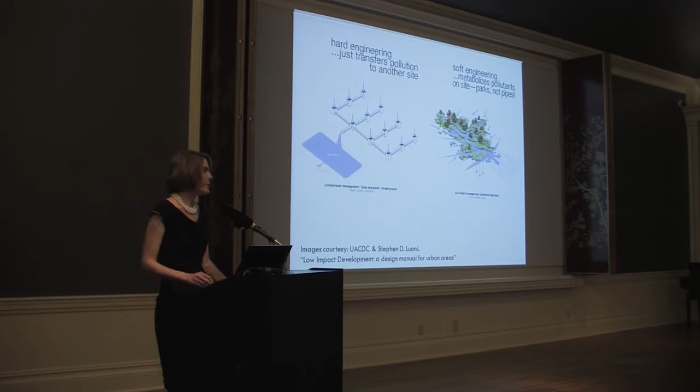Low impact development is a way to treat stormwater runoff that mimics the natural hydrology of a site, instead of the traditional method of piping it off site where it's not treated and goes directly into the streams. By using LID, you're able to filter out the pollutants and treat them on site, through the soils and through the plant material.

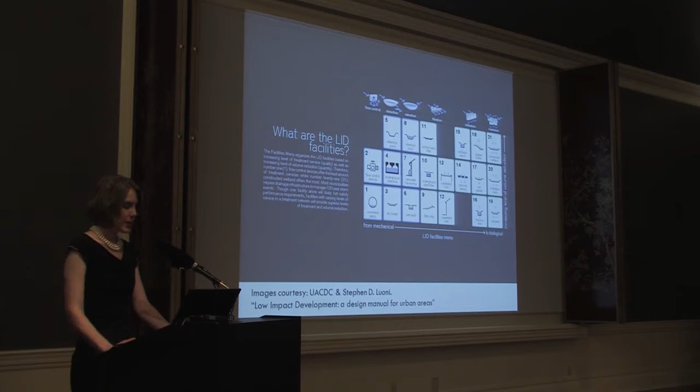So there are economic benefits because you use less pipe, but you also reduce flooding issues. There are many different types of low impact development technologies, like bioswales, tree box filters, infiltration basins, and filter strips, and teams were encouraged to pick a few that would work with this specific site. There are many more they could have picked from.

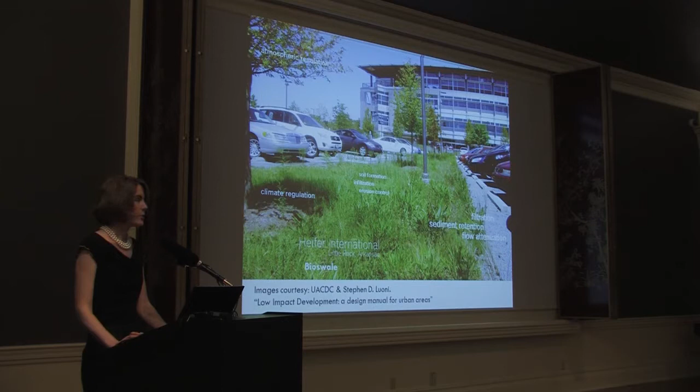This is an example of a bioswale in Little Rock. The water runoff from the parking lot goes into the bioswale, where the pollutants are treated.

Here is another parking lot in Missouri where porous pavement is used, along with the concept of using trees to evapotranspirate the stormwater. In Texas, there was another bioswale on the side of the highway that treats the pollutants coming off the highway, and also a tree box filter along a sidewalk.

And engraved in the cement it says 46,300 gallons of stormwater treated at that location. So it's one way to actually provide education in low impact development.

A competition is an innovative way to inspire the teams, the local firms, to learn about low impact development and use it to treat stormwater.

The impetus for the competition, as the mayor said, is the updated regulations that TDEC is rolling out in the next few years. Every municipality is going to have to face them, so this is one way, a fun kind of way, to get people ready for that.

Memphis-Shelby County Office of Sustainability is grateful for all the teams that participated, because by participating they advance the use of low impact development by demonstrating the economic impacts and the environmental impacts. So I want to thank them all for participating.

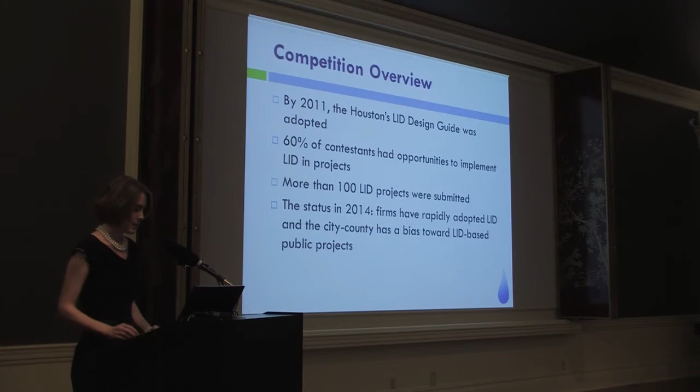Our project site is owned by United Housing. We have Tim Bowling, who owns the property, and his group is a nonprofit affordable housing agency. The location is at James, McLean and Fraser. They've already started building phase 1 of the Wolf River Bluffs, a 34 single-family development in Fraser, using EcoBuild design standards, which is MLGW's energy efficiency design standard for their housing stock, and the houses also have solar panels on top.

With their commitment to green development, we thought it was a natural fit to pick their location for the design competition. In green, you can see their phase 1 that's being built, and in yellow is the project site for this design competition.

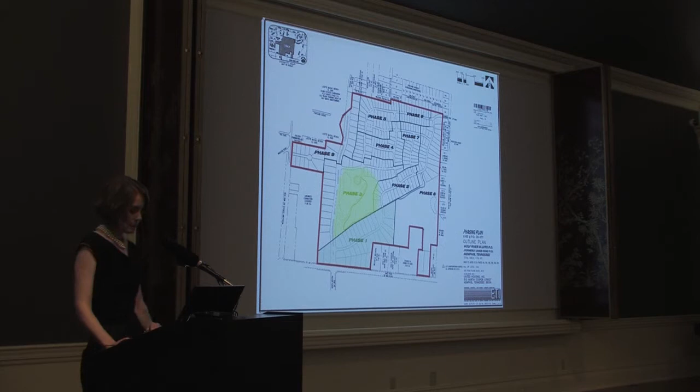Overall they have about 100 acres of property. Currently it's a wooded site with a 1 acre lake. As you can see from this 3D vicinity map, the site is extremely challenging because of topography. There's a large depression there, and it would normally be the last place on Earth you would build houses. So we definitely gave them something to shoot for.

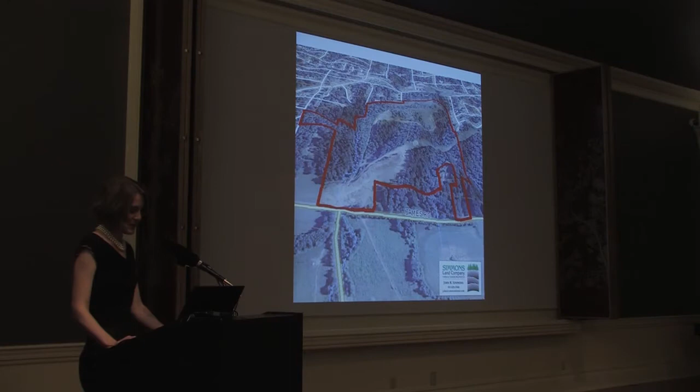I just have a little video that will kind of get you a feel for the landscape. And that's McLean and James right there.

Our teams that participated today had to have 1 licensed civil engineer and 1 licensed landscape architect, and they could add to that any way they saw fit. The goals were to reduce runoff, improve water quality, and lower the total cost of development. Teams had to treat the first 1 inch of rainfall, and if they couldn't do that, they had to treat the remainder for pollutants.

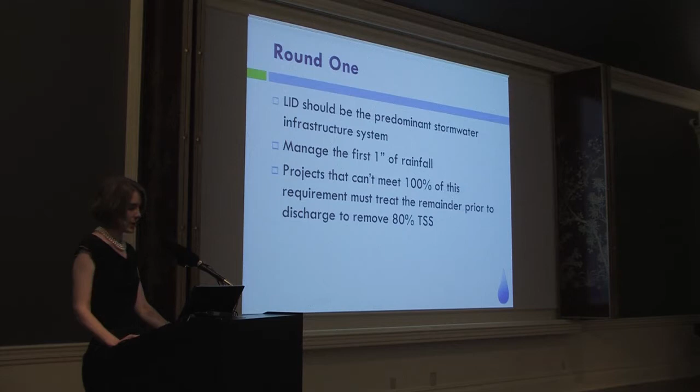United Housing had their own set of criteria for what they wanted to see on their site. It's 12.5 acres with a 1 acre lake. They wanted 4 one-story townhomes specifically for seniors, at 800 square feet, in cluster development with parking scattered throughout the site rather than one massive parking lot. They also wanted a small amenity center, gated access off McLean Boulevard, and passive recreation around the lake for the seniors.

Round 1 judging was 80% of the score, and that's already taken place by the experts in Houston. I went out to Houston and participated and observed them. They are all leaders in low impact development for Houston, and they were really glad to participate.

Round 2 celebrity judges are here tonight, and I want to introduce them: Mayor Mark Luttrell, Shelby County Mayor, who already gave welcome remarks. And then, if you want to stand: Bob Martineau, TDEC Commissioner, Jim Strickland, City Council Chair, and Mark Billingsley, County Commissioner.

Don Green, President-elect of Tennessee Stormwater Association, comes from Chattanooga, and he just finished his own low-impact development competition, so I appreciate him coming that far. Tom Needham, Director of Public Works for Shelby County.

Manny Belen, Deputy Director of City Engineering. Chip Saliba, Land Use Controls Manager for OPD. Mike Flowers, Landscape Architect and Administrator of Parks for City of Memphis. Rick McClanahan, Director of City Engineering in Bartlett.

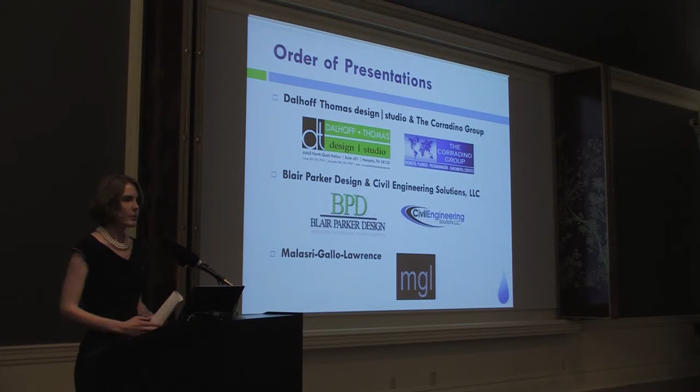In the order of presentations tonight, this was randomly chosen. Dalhoff Thomas will come forward first, then we'll have Blair Parker, and then JT Malasri-Gallo and Lawrence. So if Dalhoff Thomas could come forward and get your mics on. Each person will have a 7 minute lightning round presentation.

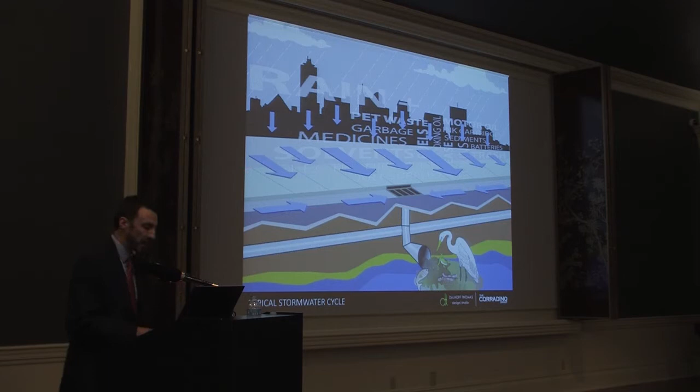Stormwater is one of those elements that is often out of sight and out of mind. In our normal stormwater cycle, we direct runoff full of pollutants into an inlet where it goes into a pipe and eventually empties into a water source such as a stream or lake. In a neighborhood, this is traditionally where it ends up, in a big grass detention basin. It's unsightly and takes up land that could be used for homes or parks. So why do we do it this way? Well, you'll hear it's efficient, this is the way we've always done it, and this is what we know. But what if there's a better way?

Our design focuses on 5 elements, and these icons will be repeated throughout our presentation: site planning, economics, stormwater, environmental, and quality of life, to make a better development.

Our site plan starts with locating homes on 3 areas on site for a total of 40 homes. We avoided development in this area because it acts as a major drainage way for the properties to the north. We preserved the existing pond and located a clubhouse with a green roof at the southern end. We have a gated access from McLean and 2 internal drives for access. We located a neighborhood park in the existing MLGW easement, and we also have street trees and pedestrian lighting throughout.

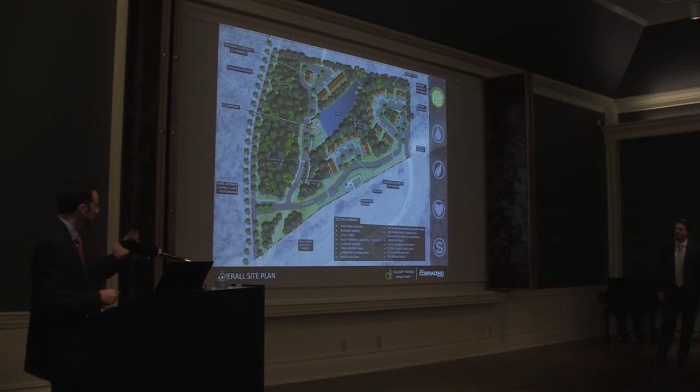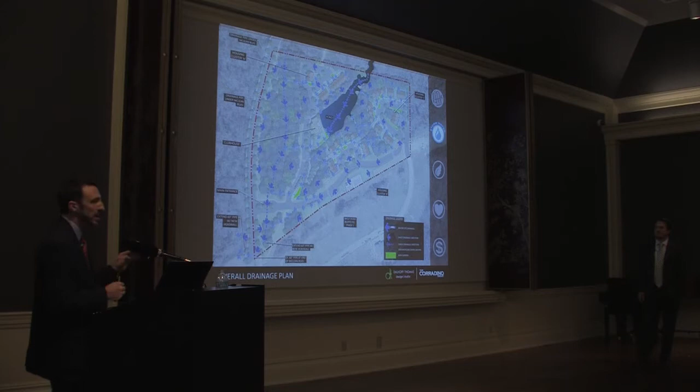Our drainage plan maintains the existing drainage patterns on site. Our design takes all the runoff from the roads and parking areas full of pollutants and captures it in over 40 rain gardens dispersed throughout the site. It infiltrates it and cleanses it before it is released into natural areas and flows into the pond, all without any traditional pipe or structures. The stormwater that is finally released into this western portion is a smaller amount because we allow much of it to infiltrate. It's released at a slower rate so it won't contribute to overwhelming the storm system. It's much cooler and it's much cleaner.

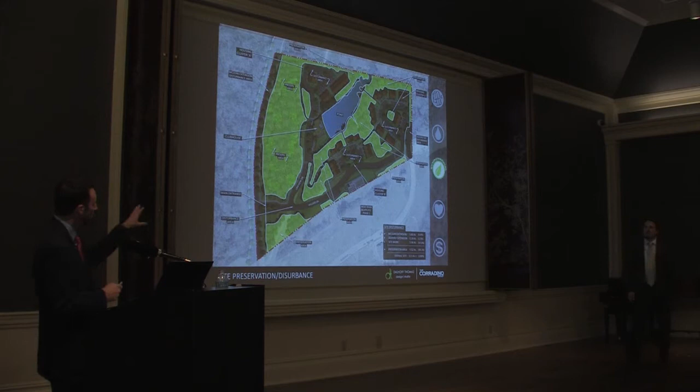From an environmental focus, we worked with the existing topography and tree cover to maintain 44% of the site, as you can see in green, as undisturbed.

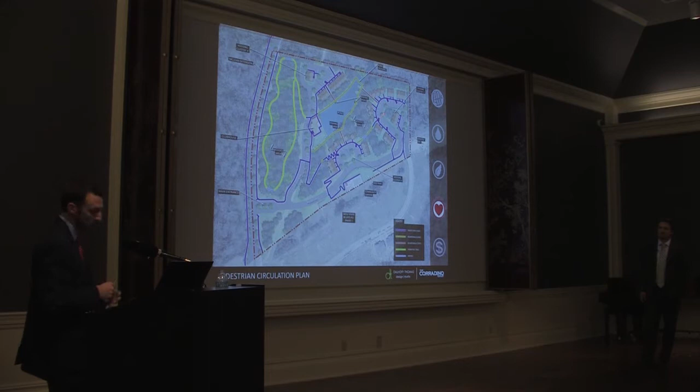With senior housing, accessibility is an important quality of life. So the purple, orange, and yellow lines all designate ADA paths that make the entire property pedestrian accessible. Also important to the quality of life are the amenities and open space. Our community park contains a garden area and a dog park. Green space is distributed in all the clusters so that residents have a place to walk their pets or have activities. And a large lawn is located at the clubhouse for community events.

This enlargement shows how all the elements come together in a housing cluster. The homes are accessed from a one-way drive. We have angled parking and provide 1 parking space per home plus visitor parking. The homes are built on conventional foundations that step down the slope. Trees around the cluster are preserved so that every home has views into existing woods. Rain gardens and private gardens are provided at the front of every home, and paths provide access to the adjacent cluster, down the hill to the clubhouse, and down to the boardwalk around the pond.

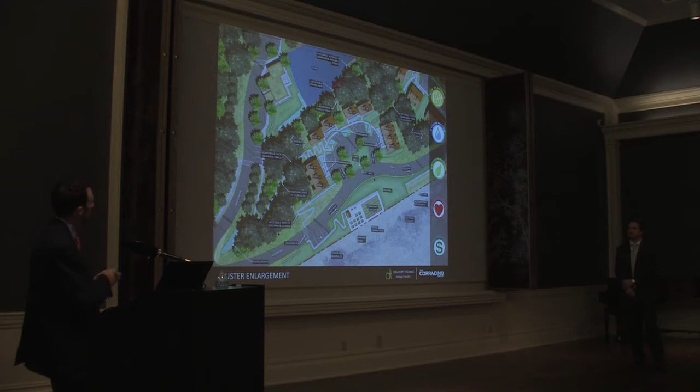This is how the rain garden works. Each of these homes' foundations has a finished floor that is stepped so that it's lower than the one next to it. This allows us to elevate the paths that lead to the homes so that we create these rain garden cells in front of each home, connected by openings under the sidewalk. The profile of our rain garden includes 30 inches of soil with an 8-inch drainage layer, and in that 8-inch drainage layer is a 6-inch perforated drain pipe. So we direct stormwater into our rain garden cells. Within the cells, the water is allowed to pond up to 6 inches in depth. This slows the water down and allows it to infiltrate into the soil.

We also have the cells planted with native plants. They help slow the water down and take up the water. Many of these plants are hyperaccumulators, meaning they actually absorb the pollutants in the water. So once the water reaches this 6-inch depth, the opening beneath the sidewalk allows the excess drainage to flow

into the adjacent rain garden where it can be cleansed or infiltrated. This treatment method continues all the way down the hill through the cluster until the stormwater is released as sheet flow, flowing across the natural vegetation into the pond. In a large storm event, each cell has an overflow pipe that can carry water through an underground piping system to the release point.

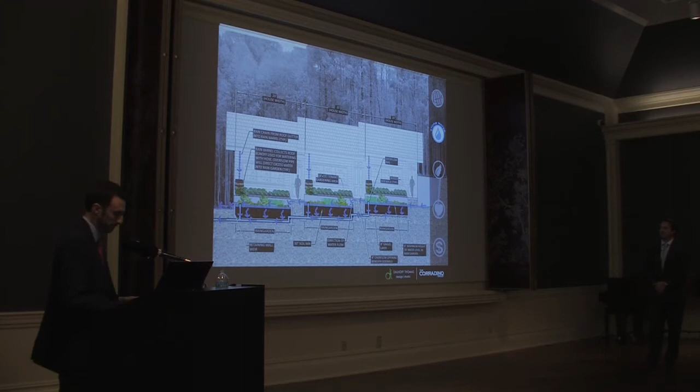Our design creates a garden at the front of each residence. This is a rain garden next to the private garden, and it provides not only stormwater control, but plant habitat and wildlife habitat. Each home is also equipped with a rain barrel to collect rain to water their private garden. Residents get to interact with the garden every day, and whether they know it or not, they're looking at the stormwater control system. Wouldn't this be a great place to be?

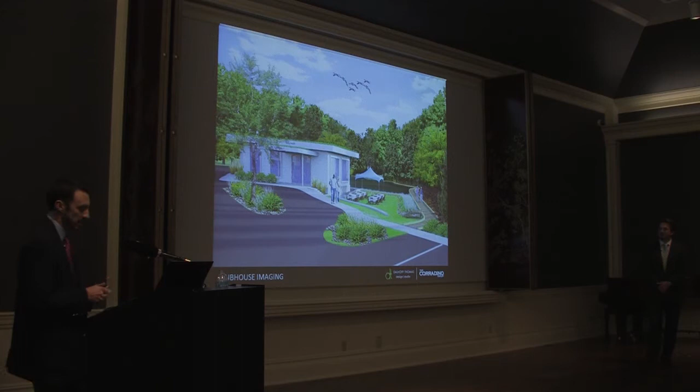Now at our clubhouse, the event lawn is separated from the pond by a low wall. In large storm events, the pond is actually able to overflow the wall into the lawn area, which is designed to flood and act as a temporary detention basin until the rain garden can accommodate the runoff. So what we've been able to do is take a detention area and rainwater that's treated as a nuisance and highlight it with this.

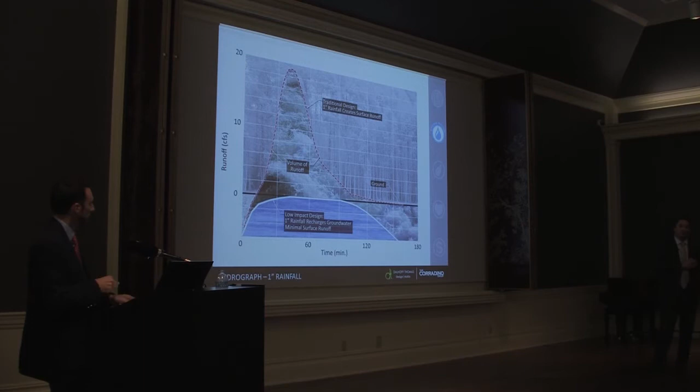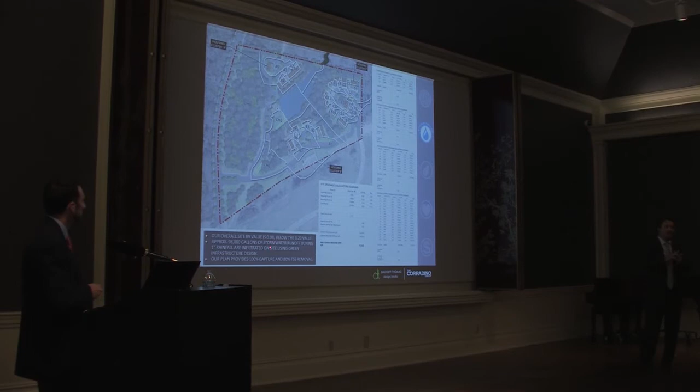Obviously this has a high impact on cost for projects. We ran some analysis on the runoff coming into the site, the rainfall coming down, versus how these rain gardens are able to perform. What we found is it performs very well. We found a runoff coefficient, again engineering speak, of 0.08, infiltration of 98,000 gallons of water for an inch of rain, and 80% suspended solids capture. We did a cost comparison of traditional design versus green design: $80,000 less, and 2.4 times less expensive per gallon of water.

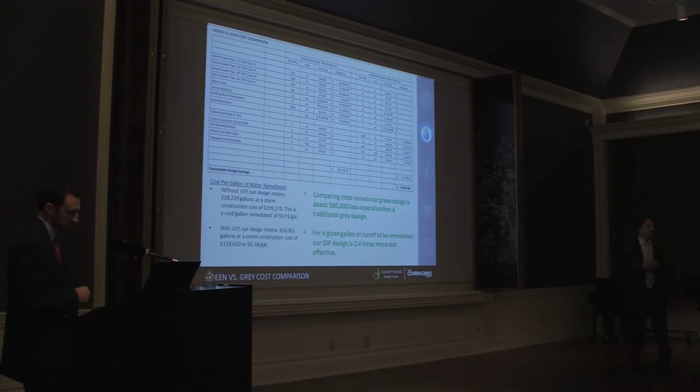So in summary, our design solution utilizes green infrastructure techniques with a focus on environmental site planning, stormwater, economics, and quality of life, to locate 40 cluster homes in an exceptional living environment with tons of amenities. We achieved 100% capture of the water, 80% of total suspended solids meeting requirements, $80,000 less in cost to capture all this water, 98,000 gallons of infiltration, and 2.4 times more cost effective than a traditional design. Guys, it works.

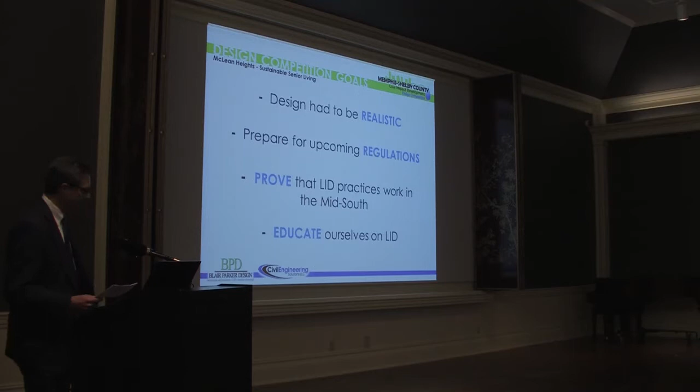Thank you. Before you purchase a townhome, let's share a few things with you. We had personal goals, professional goals, and team goals. First and foremost, we wanted a design that was very realistic. We wanted to prepare for the upcoming changes in the stormwater regulations. And we wanted to prove that LID would work, using this competition to educate ourselves on LID techniques.

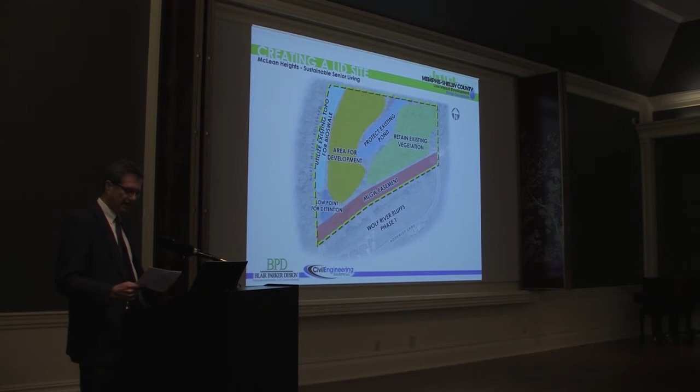The green bubble shows a mass of trees that we're saving—there's tremendous slope under that green bubble. The blue bubble is a pond we're keeping. The red bold line at the very bottom is an area that can't be developed because it's an easement. The orange bubble is the area we're actually developing.

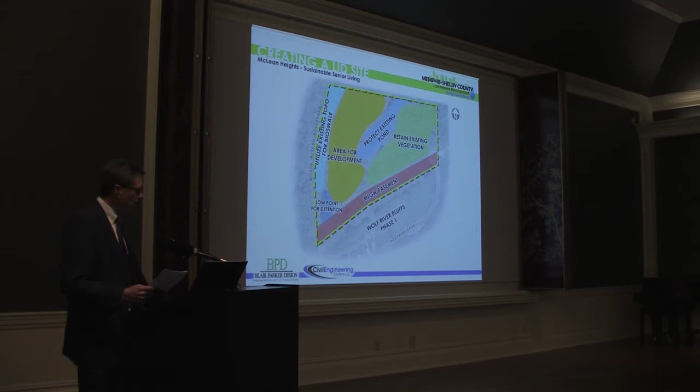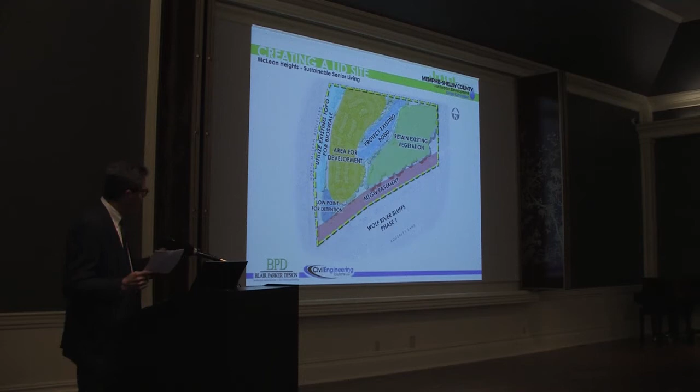It actually shows up a little yellow there, doesn't it? You'll see our design coming through, and how tight it is, but it fits all within that orange bubble. Visualize the whole area—we're touching a very small portion of the overall site. If you put the developable area together, we're developing only about 49% of the site. Does that not fit nicely in there? We believe it does.

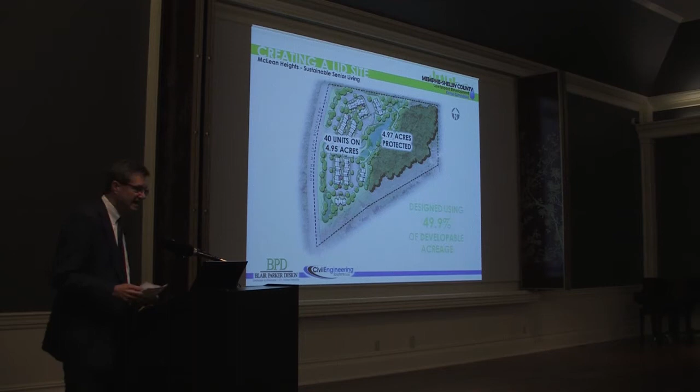Next is a bird's eye view that shows our vision of what we believe this project should be.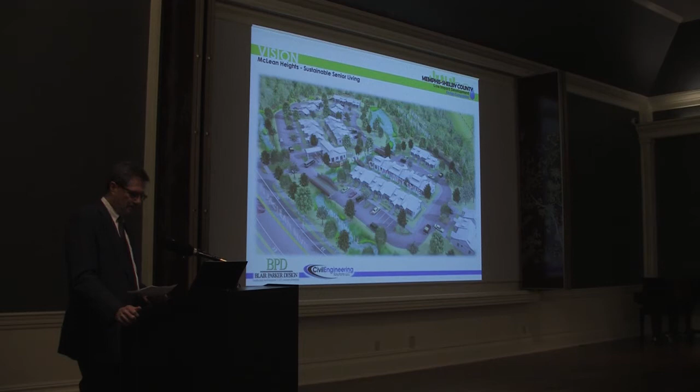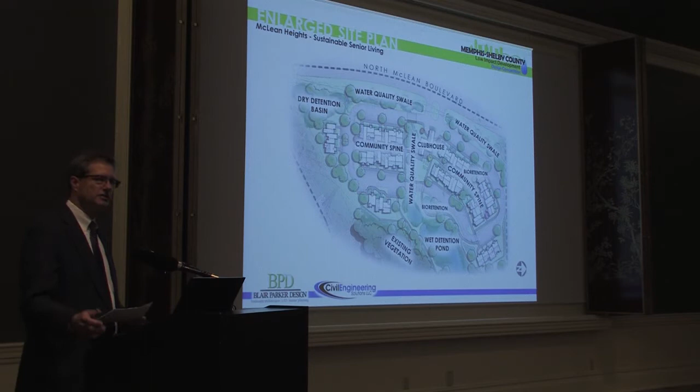In the middle is a community spine, and you'll drive in off of North McLean Boulevard to a driveway surrounding the townhomes, with all of the bioswale and retention areas within this overall development. The central spine located here is a pedestrian space—we believe it's for gathering, for moving back and forth, being able to go talk to the folks at the other end of the development without getting in your automobile, if you'd like.

This is a perspective we've prepared within the community spine, looking towards the clubhouse, and this is how we envision this space being—a spot for us to walk back and forth. It's totally accessible, and we have bioswales and other stormwater retention amenities within there.

Throughout this community spine and across the entire site are several stormwater treatment facilities. So how do these facilities work? This detail of a bioretention area, also known as a rain garden, will help explain.

As it rains, the above-ground ponding zone fills with water to be absorbed by native plant vegetation. It then percolates through the growing media, which filters out pollutants and reduces total volume, and into a gravel course below. Void space here provides extra underground detention. Water then flows from the gravel course back into the native soils, helping recharge groundwater, and the vegetation evapotranspirates water back into the air.

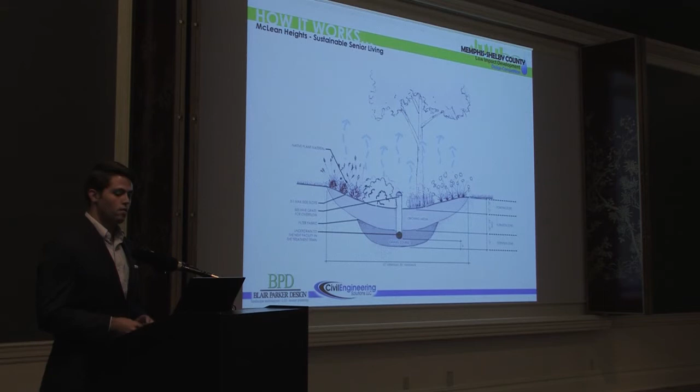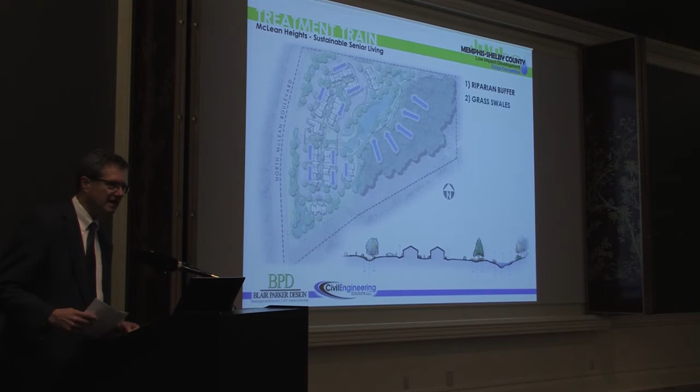This is only one example of the LID features used on site to comprise our treatment train—the various LID techniques we've used on this property. We've got them listed here: the riparian buffer against the pond, grass swales, bioretention areas, filter strips, wet detention pond, water quality swales, and dry detention basin.

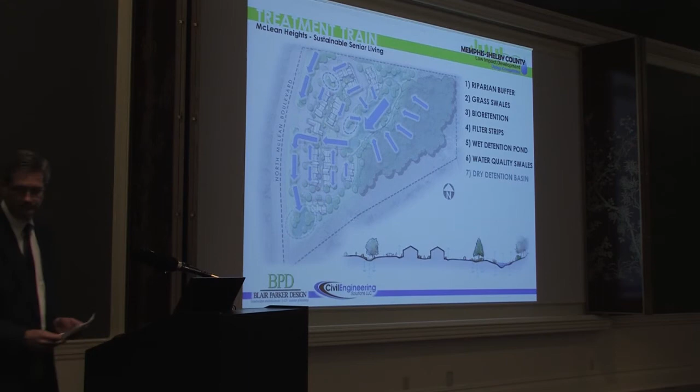Blair just went over each component of the treatment train we chose in our design. The slide before you now shows hydrology and hydraulic calculations presenting the volume of water we were able to reduce through each of those components. It'd probably be easier to understand through a simple bar chart, so we prepared one for you.

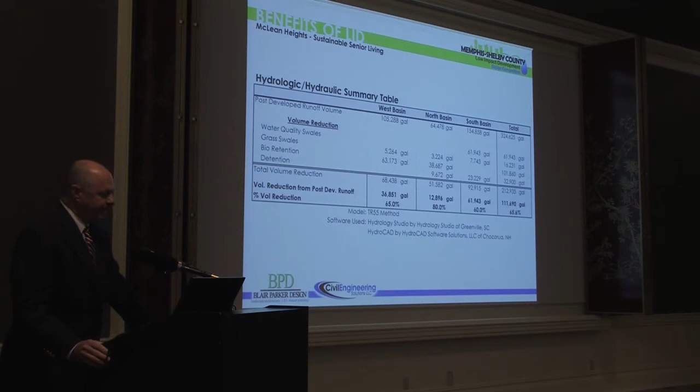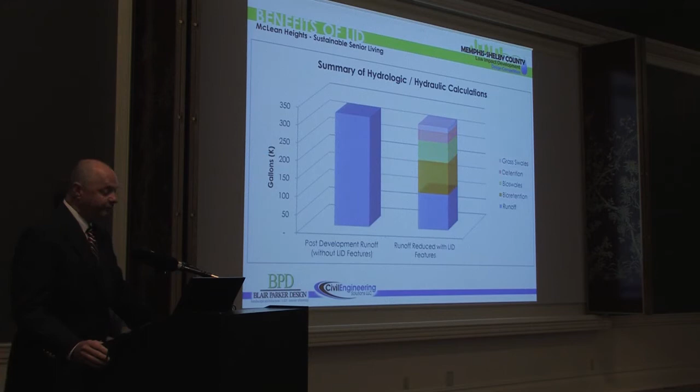The bar on the left is the total calculated volume of runoff without any LID treatment. The bar on the right shows each component's volume reduction, so you can see how much we reduced stormwater runoff—about 65%. An added benefit, as Owen mentioned, was improved water quality through filtration.

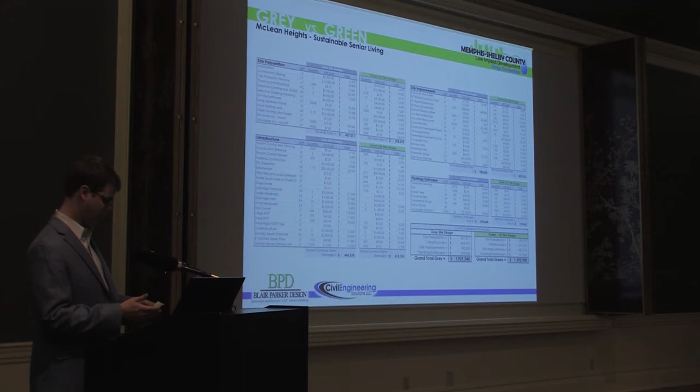Okay, so LID has all these great environmental benefits, but let's look at it from a different perspective—cost. As part of the design process and the competition, we compared standard development versus green development, the gray versus the green.

Here we have a summary chart showing that in each of the four major development categories, we're showing a range of savings from 7% to 37%. When you combine these into an overall lump sum for our design, McLean Heights, we found a 27% reduction in development costs.

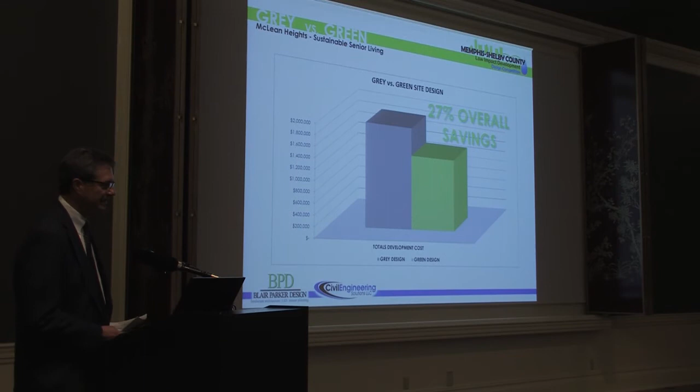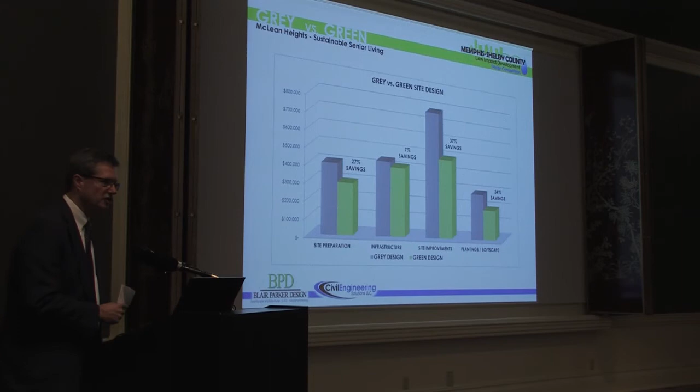But why would the cost of planting in a gray design versus a green design be any different? On the right-hand side, you'll see a 34% savings for the green design. Why would that be? I scratch my head and wonder, that doesn't make much sense to me.

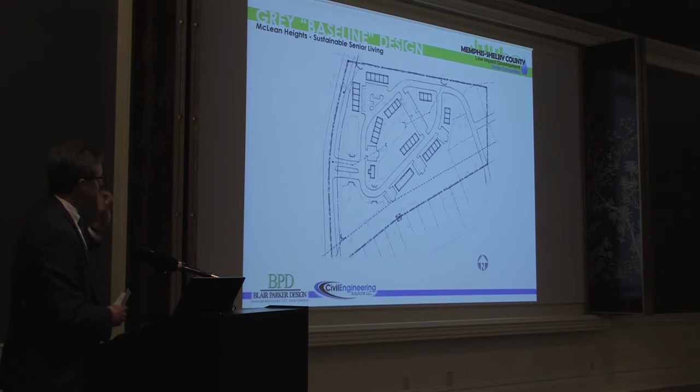But when you realize with the gray design, this is standard development, we come in and wipe out all sorts of trees, and at some point that's expensive. Then you have to come replace those trees. That's a lot of money.

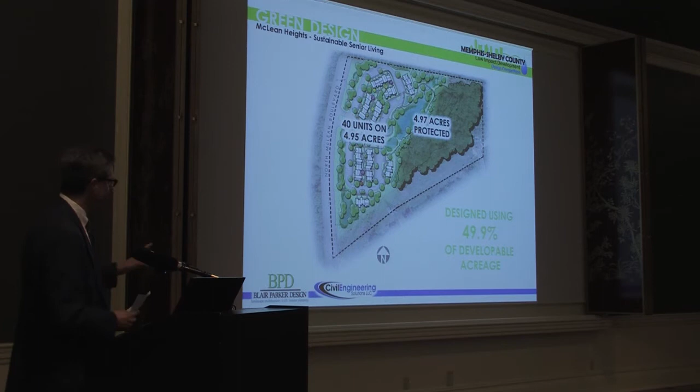With LID, good practice with LID, you can do it very effectively and remove very little of the existing vegetation. Notice the numbers, 40 units on 4.95 acres. We have 4.97 acres that are protected entirely. So we've designed using 49.9% of the site.

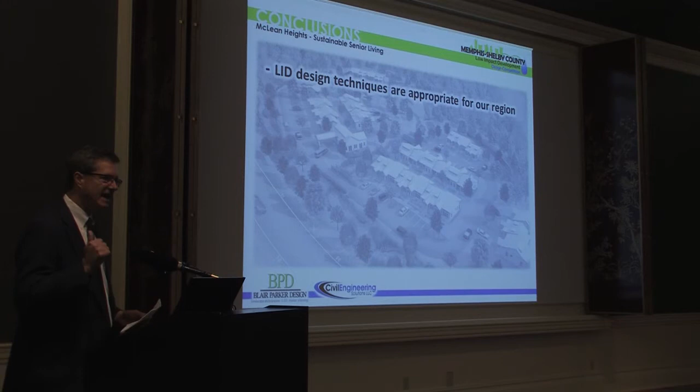So to conclude, with our design, we realize now that LID techniques can work in our region. We know this is fact. Our site design works and functions very, very well. We reduced development costs by 27%. We reduced stormwater runoff by 65%. That's huge. And we met all the criteria for the competition, every bit of it.

Thank you very much, and we appreciate this opportunity.

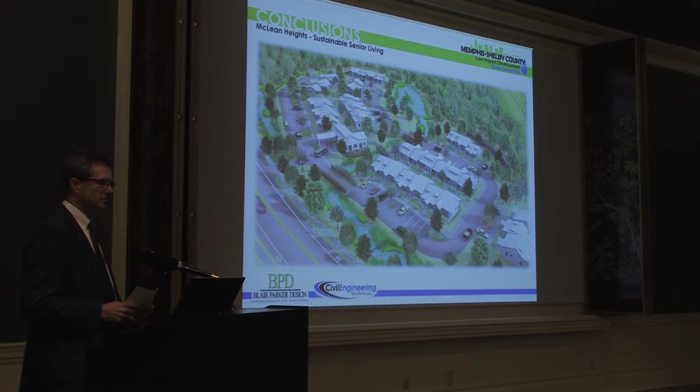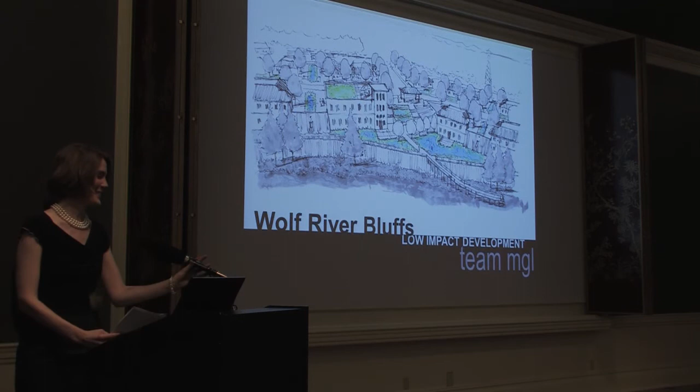Thanks, guys. Do you want the lapel mic? No one wants the lapel mic. I'm scared of that mic now. Thank you.

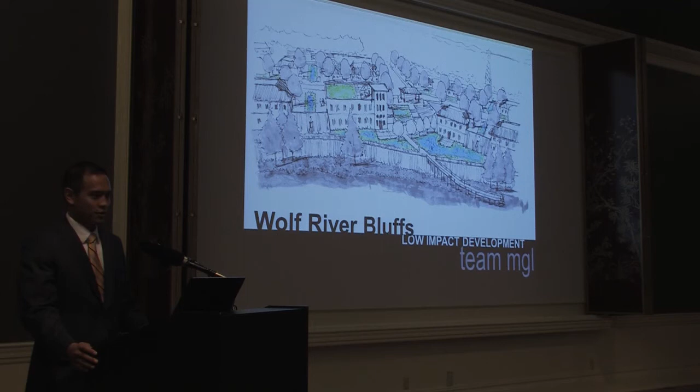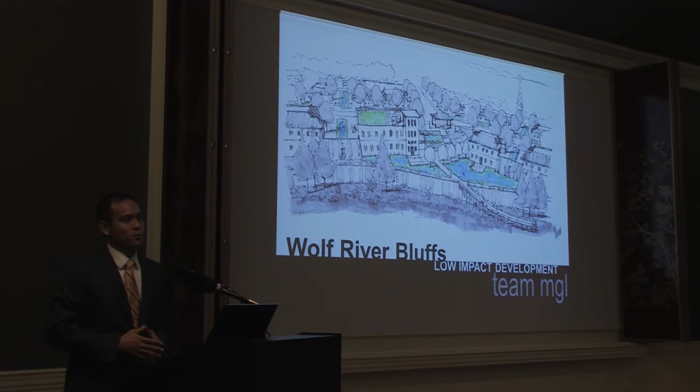My name is JT Malasri, I'm a civil engineer with a background in infrastructure and water resources. This is Corey Gallo, a professional landscape architect who specializes in urban design and green infrastructure. And this is Tom Lawrence, also a civil engineer with a background in water resources.

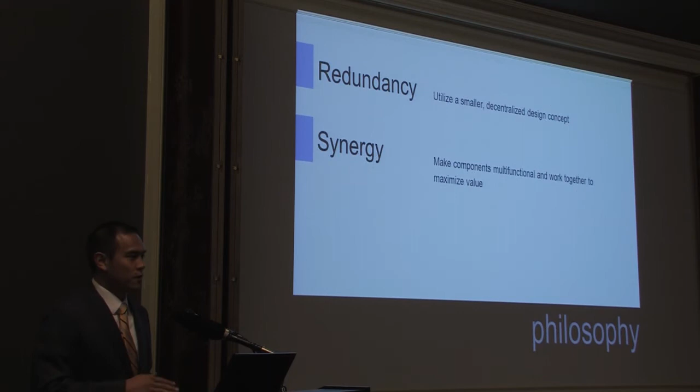We'd like to share with you a story tonight on how we came up with our design. It starts with our philosophy of three design components. The first is redundancy - we wanted to utilize a smaller, decentralized design concept. The second is synergy - we wanted to make our components multifunctional and work together to maximize value. The last is connectivity - we wanted to create relationships and ties with both existing and proposed systems and features.

We used an iterative approach for our design where we started with a site layout and looked at it from multiple perspectives, making incremental changes per iteration. We looked at it from human functionality, land use, flood prevention, and water quality. About a week out from the submission deadline, we were on our fifth iteration.

For this particular project, we had seven major goals, which we'll highlight throughout. First, minimize disturbance. Second, limit major infrastructure improvements. Third, create an accessible, dynamic neighborhood. Fourth, offer a rich pedestrian environment. Fifth, provide dynamic open spaces. We also wanted to provide distributed vehicular access and incorporate a rich network of BMPs to manage stormwater on site.

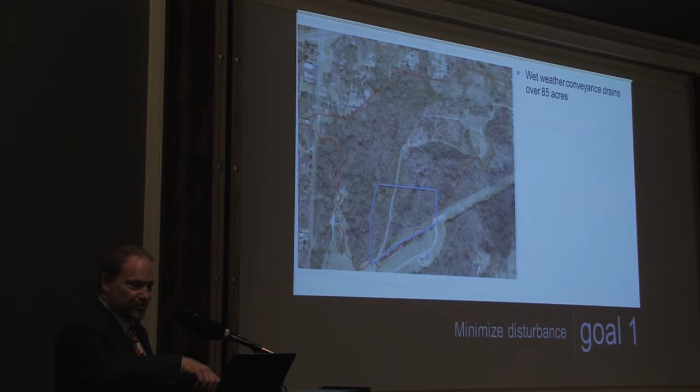Our first goal was to minimize disturbance. We went out to the site several times and realized this wet weather conveyance is really a drainage feature for the whole area, draining all the area within the red line. It all comes out at that point at the bottom where we have the arrow. We realized we really want to preserve that because it's a great functioning system already.

So we focused all of our development on the far right side, and we protected the lake and also the hill to the north where we saw several mature trees we really wanted to protect.

Our second goal was to limit major infrastructure improvements. So what we did is just extend Adderley Lane the minimum amount, 280 feet, to get access to our property. We proposed a connection to McLean, which was required, but we put it as an option because we feel it would damage the wet weather conveyance. All of this is in line with the master plan you see on the screen.

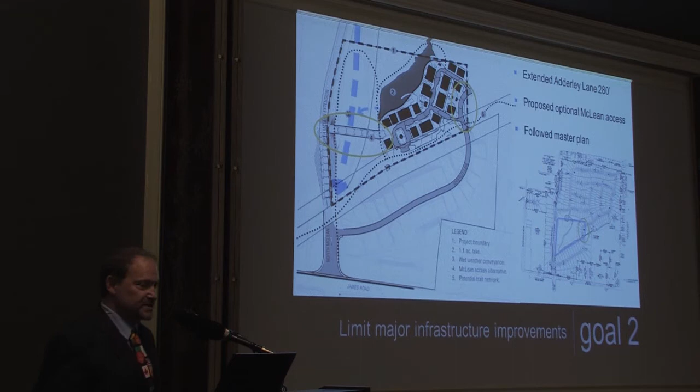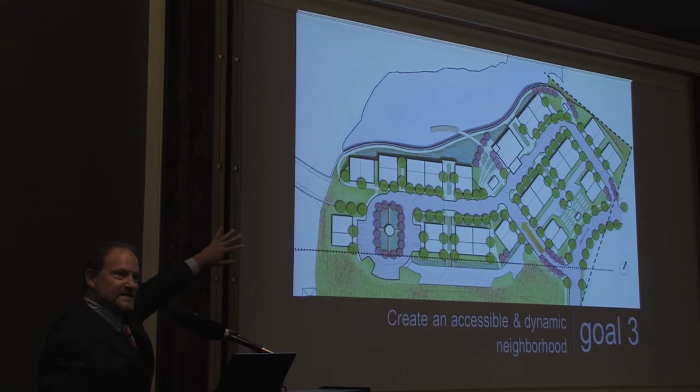Our third goal was to create an accessible and dynamic neighborhood. So what we envision is as you come into the neighborhood off of Adderley, you get a pretty view over the lake and the hillside with the mature trees, looking over the pavilion, which we'll talk about, and this unique curved dock, which is really a feature for the site. The site was designed to be compact, walkable, and accessible by wheelchair.

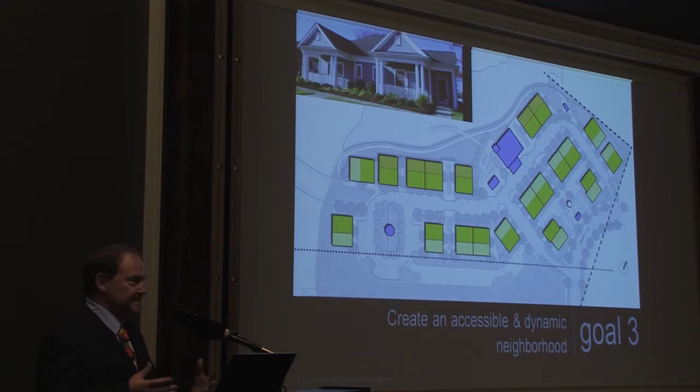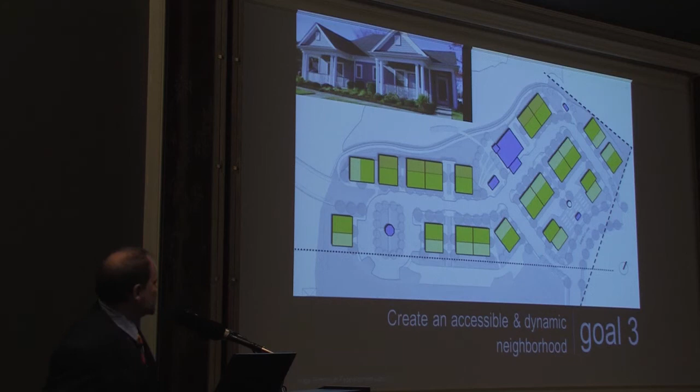The blue buildings are the public buildings, with the large one being the community center. The two-bedroom units are the lighter yellowish color, and the real light colored ones are the one-bedroom units.

The darker colored units are along the lake, which we're thinking could actually be two stories. We'll see how that works out. But this is a view of our village.

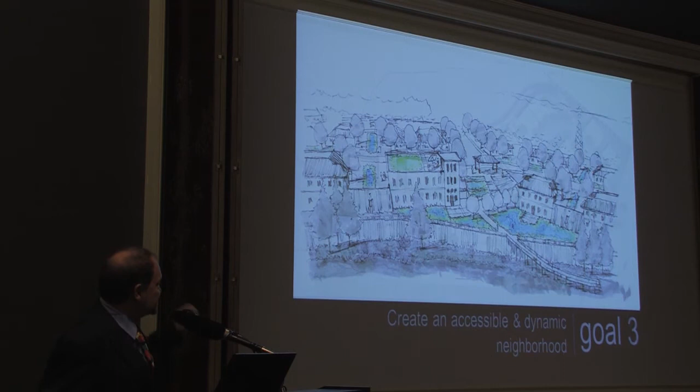Our third goal was to offer a rich pedestrian environment for wheelchairs and pedestrians. As you can see here, these are all the sidewalks, and they're all ADA accessible. We also added curb bump outs on the curves so people could cross the streets more easily, which tends to slow down the cars and make people feel more safe.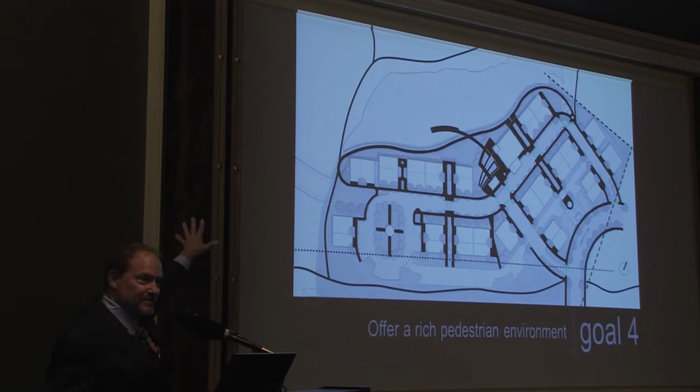We also have a trail going around the lake and throughout the property to show how people can really access the nature that the property has. And we have street trees so people could enjoy the property on their own.

We're also very excited about Goal 5, which is to provide dynamic open spaces. That is anchored by the lakefront promenade, which runs north-south along the lake. We also have two spaces we call green mews, spaces between buildings that create linear connectivity east-west of the site. You see the cross-section there, what those spaces would look like.

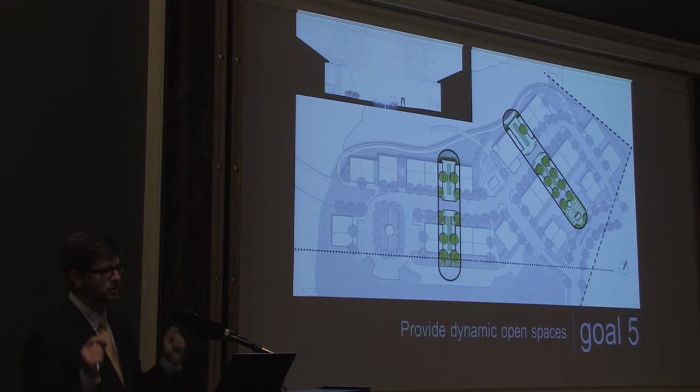So also, the open space system has four green nodes, or park systems. Two on the north and south offer post office pickup. The main one in the center is the gem of the project, which is at the community center, and it has a green infrastructure demonstration pavilion as well as an amphitheater.

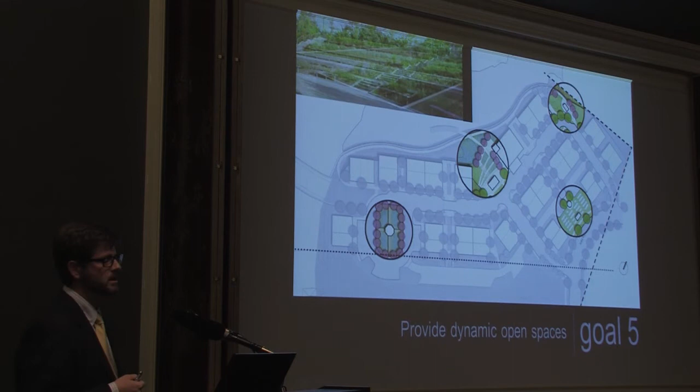We also have a community garden, which is on the edge of the site, which we hope is a center for this neighborhood, but also allows this community to connect to the larger neighborhood in the future, which will be built later to the east and north.

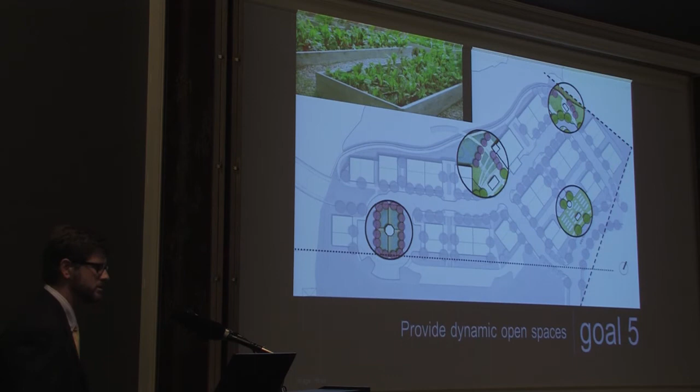So goal 6, provide distributed vehicular access. We decided to do this without parking lots and without dead-end roads. So we did this with a combination of narrow roads and alleys with parallel parking and head-in parking along the alleys.

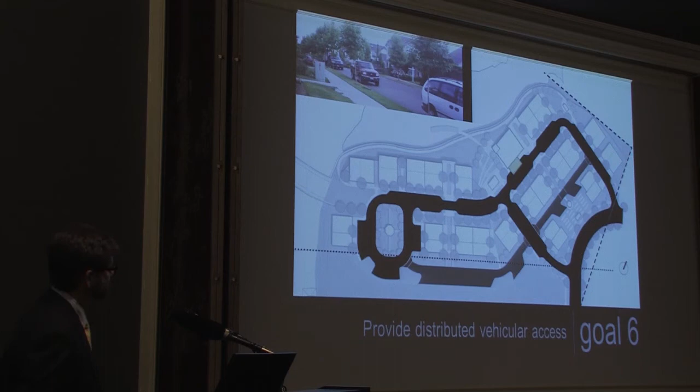This allows very close parking to all the units, and also a very distributed network. We've also provided for a drop-off loop to the Civic Center there, where the orange overlay is.

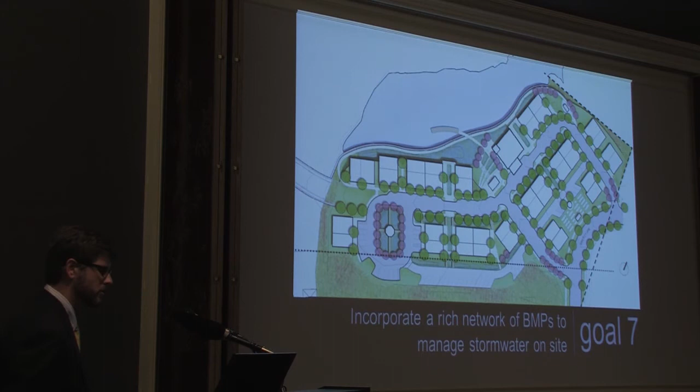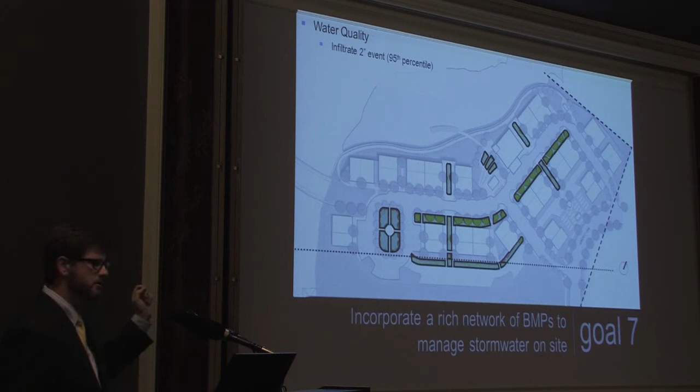Goal 7, of course, is a lot of what this is about: incorporating a rich network of BMPs to manage stormwater on site. We've run through the sizing model and the calculations and determined that focusing on green infrastructure and bioretention or rain gardens, this is the area that would be required to infiltrate the 2-inch event, or the 95th percentile.

In other words, we've infiltrated 95% of the rainwater through the year. We've focused on bioretention primarily because of the cost savings. It's about 1/10 the cost of pervious pavement, for instance. We also looked at, since that's typically not the only thing to do, what it would take to handle the 10-year storm event.

So if you're a developer, you understand why that's important. We said this additional area, which just popped up, would cover that, or actually be able to manage both water quality and quantity.

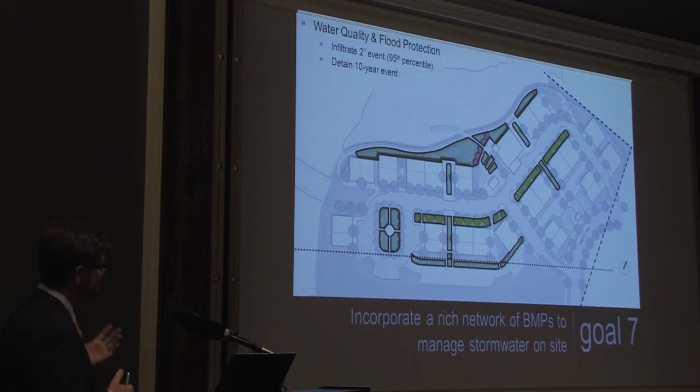Additionally, that could have been done in the lake if that wasn't available as a resource, but we wanted to show how you could do it on site and incorporate it. So this is a cross-section through one of the mews, and it illustrates how the water would be collected off of the pervious pavement and off of the roof areas. It would be collected in each one of the linear bioretention cells, which looks something like the one above.

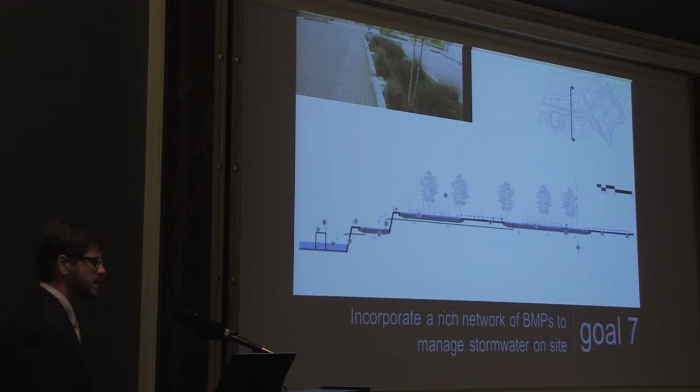Smaller events will infiltrate, larger events will convey, and then move down the terrace towards the lake in the largest events. It's a cross-section of a typical detail. Obviously, this could get wider depending on where it is in the site.

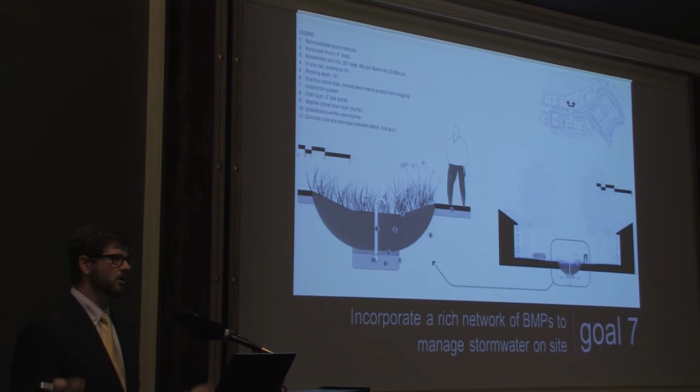But basically, this is a ponding depth that would only have water in it for at most a day. So for the most part, people walking by this would look just like a garden. So it's a garden that happens to hold rain.

And Tom is going to talk for a second. By limiting major infrastructure improvements and not doing the McLean access, we're looking at saving close to $650,000. And the cost of the infiltration basin versus a traditional drainage is about $100,000 cheaper.

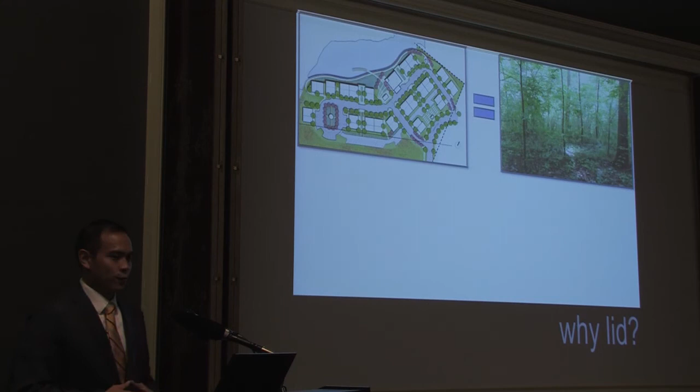So why low impact development? Well, our job as designers and developers is to create thriving, vibrant, sustainable communities and cities. And what we've shown is this 40-unit development with our design is that for 95% of all rainfall, we've mimicked the pre-development conditions, which in essence creates higher value at a lower cost. So the real question is, why not low impact development?

Thank you for this opportunity. You guys have been great.